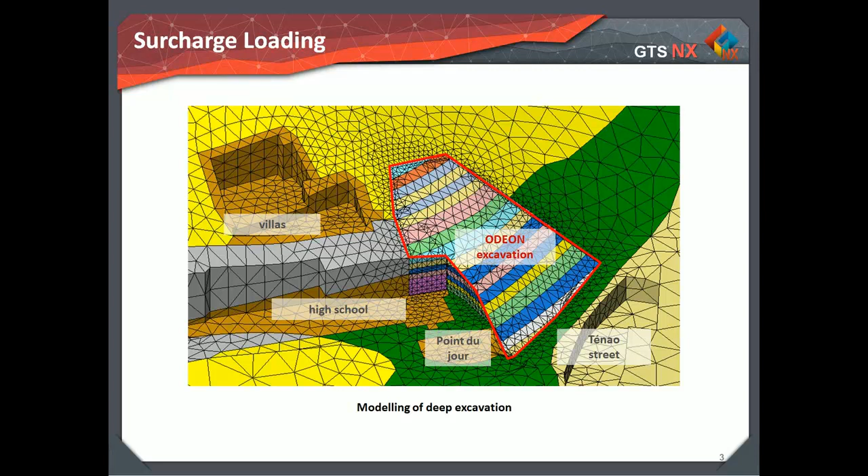There is no doubt that the building stiffness alters the pattern of retaining wall and ground movement over the greenfield situation. In any soil structure interaction situation, relative movement of the structure with respect to the soil can occur. The use of continuum elements with compatibility of displacement in a finite element analysis of this situation prohibits relative movement at the soil structure interface. Nodal compatibility of the finite element method constrains the adjacent structure and soil elements to move together.

Interface elements can be used to model soil structure boundaries such as the side of a wall or a pile or the side of a footing. Particular advantages are the ability to vary the constitutive behavior of the soil structure interface, that is the maximum wall friction angle, and to allow differential movement of the soil and the structure, that is slip and separation. The interface material can be defined using the following equation. Using the stiffness of the adjacent element and nonlinear parameters, the virtual thickness and strength reduction factor are applied. Interface material stiffness and parameters are applied differently according to the relative stiffness difference between neighboring ground and structural members. The wizard can be used to simplify this process.

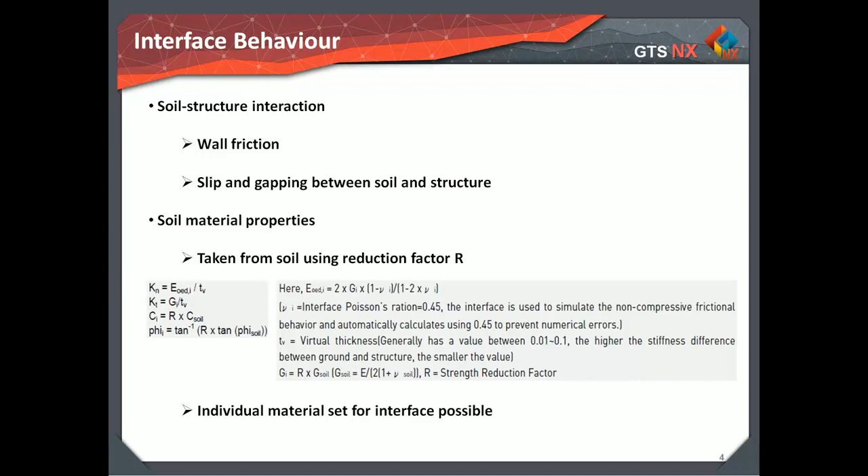The general strength reduction factors for structural members and neighboring ground properties are as follows. Checking the element size considerations calculates the interface material properties considering the average length, line, average area, face of the neighboring ground element when creating an interface. In other words, the average length and average area are multiplied by the virtual thickness in the equation below to calculate the tangent and normal direction stiffness of the interface.

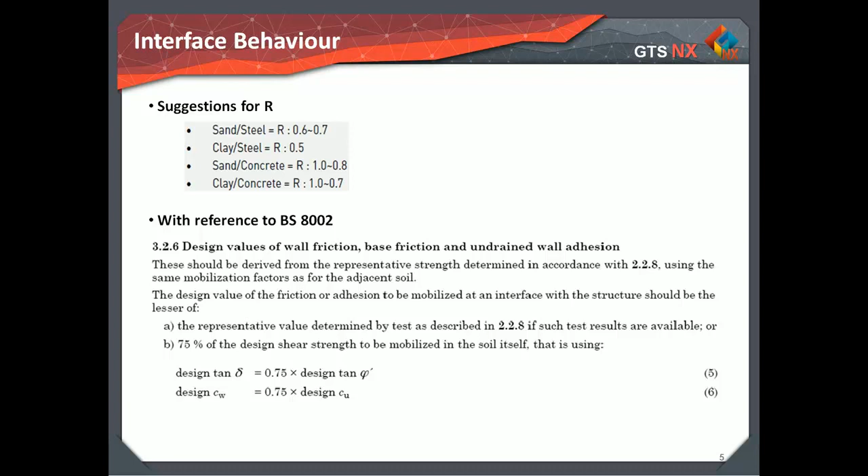A variety of techniques is used to model props and anchors. When the prop is external to the structure, it may be convenient to model the prop as a linear elastic spring with spring stiffness specified in the relevant directions. Full moment connections, such as that due to a reinforced concrete slab acting as a prop, can be modeled using solid 2D elements. The load distribution can be obtained from the compressive stress at the integration points. Anchors can be modeled by bar elements, and it is relatively easy for the program to calculate the excess force over the initial value. Beam elements have rotational as well as displacement degrees of freedom and therefore are capable of transmitting moments as well as axial force.

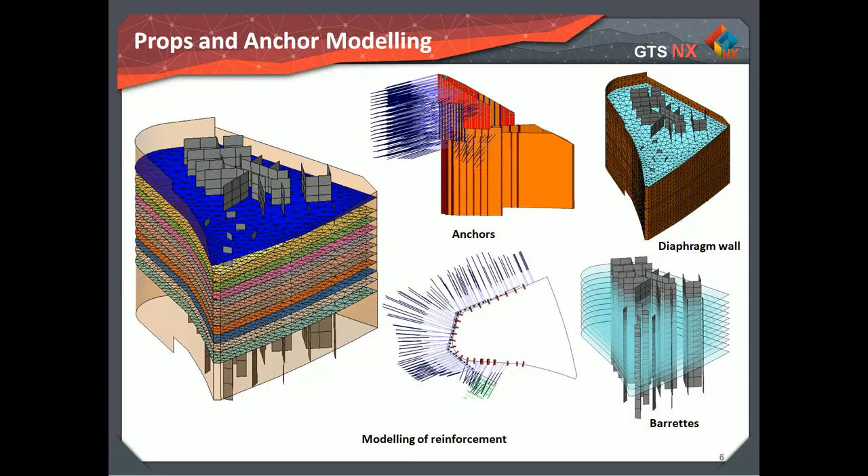Burland and Hancock illustrate this finding, for example, in their classic paper on the deep excavation at New Palace Yard in London. They assumed a linear elastic constitutive model and were able to predict the maximum measured movement relatively accurately. However, the pattern of movements predicted was inaccurate. This includes a prediction that the Big Ben clock tower would tilt in a direction exactly opposite to that which occurred. Also, the linear elastic model tended to overpredict the movement of the toe of the retaining wall. Thus, a constitutive model which incorporates nonlinear elasticity, particularly at small strain, should be used in these circumstances.

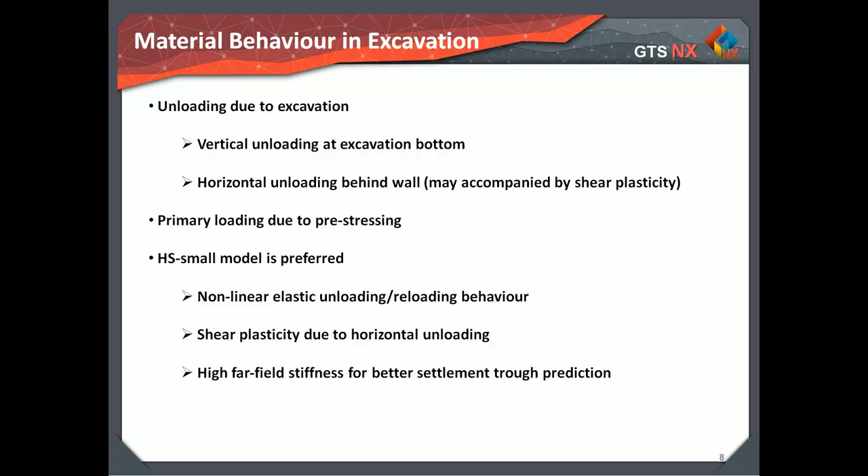It is well accepted that soil stiffness is nonlinear and that the stiffness degrades rapidly with strain. The concept of the S-shaped curve, figure in the slide, to describe this phenomenon has been well documented in the literature.

Relevance of small strain stiffness: very stiff behavior at very small strains, vibrations, reduction of stiffness with increasing strain, restart after load reversal, hysteresis in cyclic loading, energy dissipation or damping. Also relevant for applications like excavations, settlement trough behind the retaining wall, or tunnels, settlement trough above tunnel.

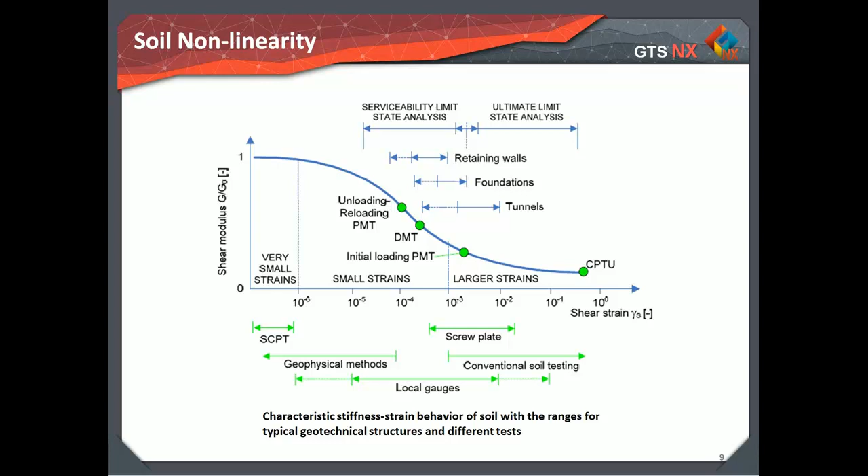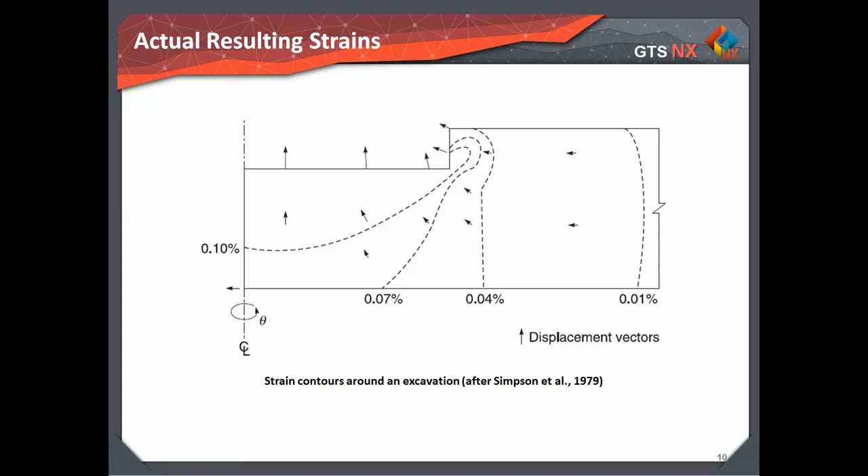It must be recognized that the strains in the ground resulting from deep excavation are very small. Figure shows that the predicted shear strains resulting from a wall displacement of 0.2% of its height vary between 0.01% and 0.1%. The figure of 0.2% height is relatively high, thus real strains are likely to be even smaller than this. The stiffness values used in any analysis must be the appropriate values for the likely strains.

The S-shaped curve shows that for strains in the typical range encountered in retaining walls, conventional triaxial test results are not applicable. This is because of bedding type errors associated with measuring displacement in conventional triaxial cells. Special triaxial equipment with local transducers mounted on the specimens is necessary. If stiffness values at strains lower than about 0.001% strain are required, then data from equipment such as the resonant column or bender elements are needed.

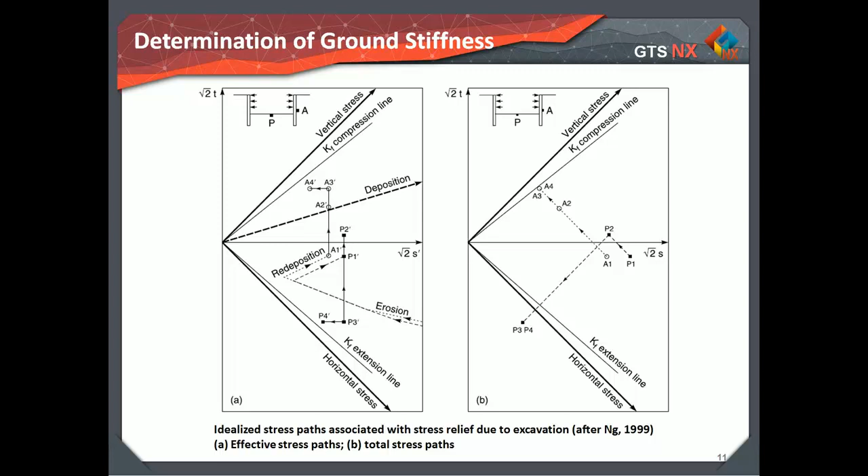There are many constitutive models available in commercial finite element packages for carrying out analysis involving nonlinear or small strain stiffness. Mohr-Coulomb is unrealistic deformations. Use of single stiffness fails to cater for the complex material at various zones, and overestimation of bottom heave, and sometimes heave of soil behind the wall, and soils below excavation behave with unloading stiffness. Even soils behind walls behave between unloading stiffness and the secant stiffness. Use of secant stiffness is too conservative.

Hardening soil model is qualitatively realistic deformation. Soil stiffness for isotropic loading, shearing, and unloading reloading can be catered for automatically in the model. More realistic bottom heave, and improved settlement trough behind the wall. Hardening soil with small strain stiffness model is qualitatively and quantitatively realistic deformations. It is improved over hardening soil to take care of far-field small strain behavior, and it is more realistic settlement trough behind the wall, narrower and deeper.

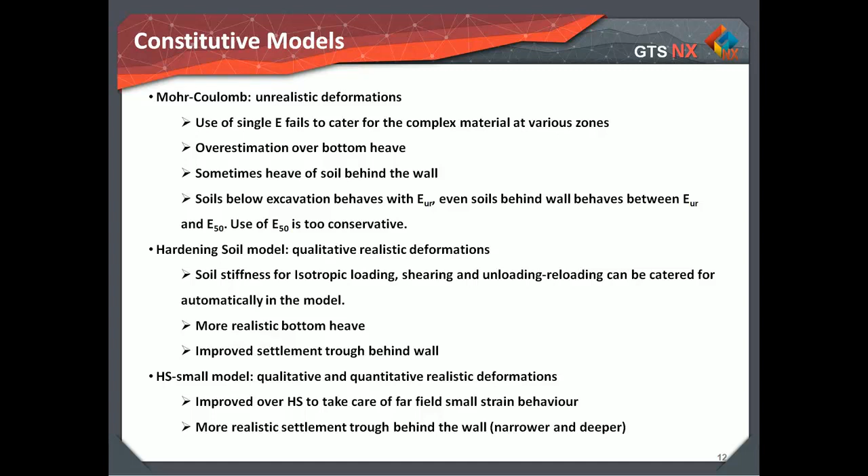Possibilities and advantages compared to Mohr-Coulomb model are better nonlinear formulation of soil behavior in general, both soft soils and hard types of soils. Distinction between primary loading and unloading reloading. Memory of pre-consolidation stress, and different stiffness for different stress paths based on standard tests. And well suited for unloading situations with simultaneous deviatoric loading, for example, excavations. And lastly, large stiffness at small strain levels, such as vibrations, but this effect is only with hardening soil with small strain.

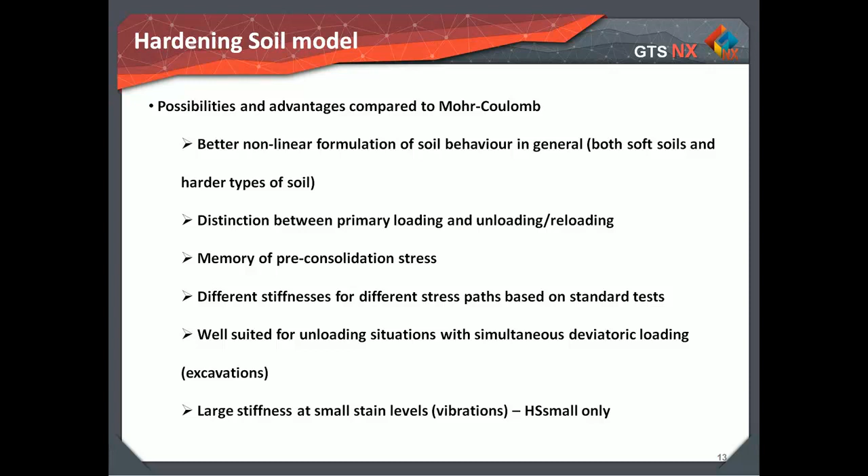The consideration of an anisotropic yield surface has significant consequence in the case of excavation in soft to medium soils. As the figure shows, on the passive side, the main yielding of the soil occurs much earlier if a more realistic anisotropic bounding surface is adopted.

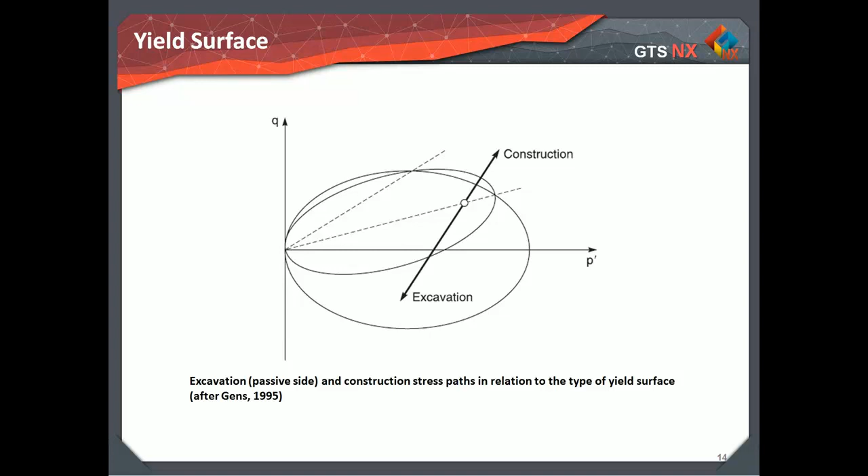Loading due to groundwater is clearly a very important component of the force acting on a retaining wall. Often, there will be a lack of relevant information in ground investigation reports. In order to overcome this, British Standard, for example, suggests a conservative groundwater regime should be assumed for design purposes. A change in the pore water pressure in part of the finite element mesh may be required. For example, during excavation in layered soils, it may be necessary to dewater granular layers to prevent bottom heave.

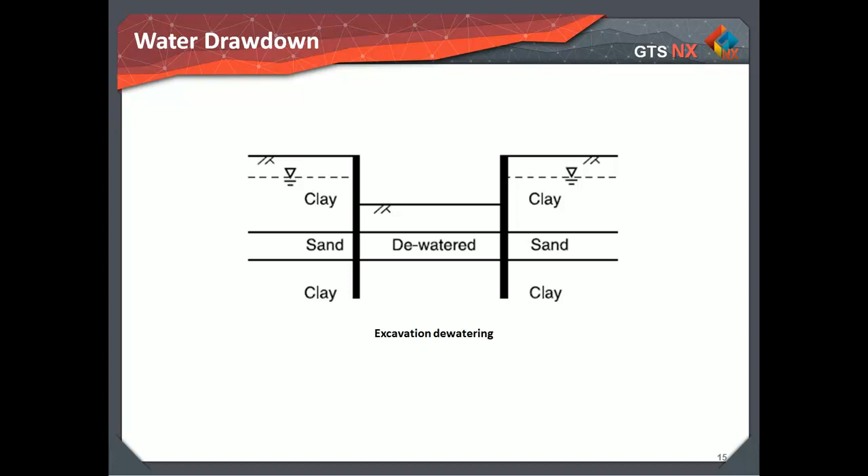For every excavation stage, in case of undrained excavation, firstly, excavate soil and then set the excavated area to a dry condition. And the phreatic level outside the excavation remains unchanged, therefore suitable for short-term excavations in low permeability soils.

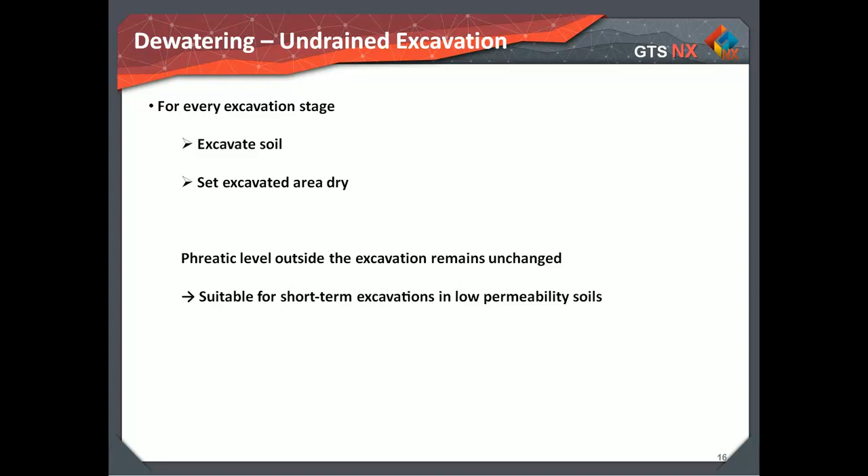In case of drained excavation, similarly for every excavation stage, firstly excavate soil and define boundary condition using the head boundary and perform a groundwater flow analysis. The phreatic level outside the excavation lowers, so it's suitable for long-term excavation in high permeability soils.

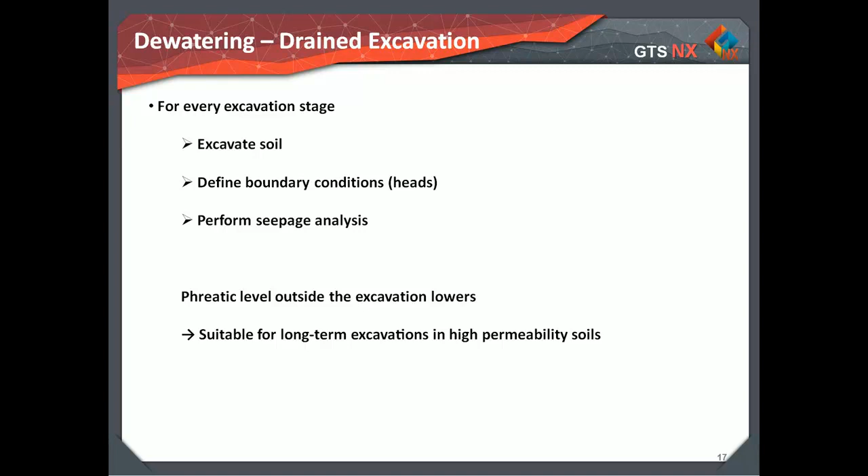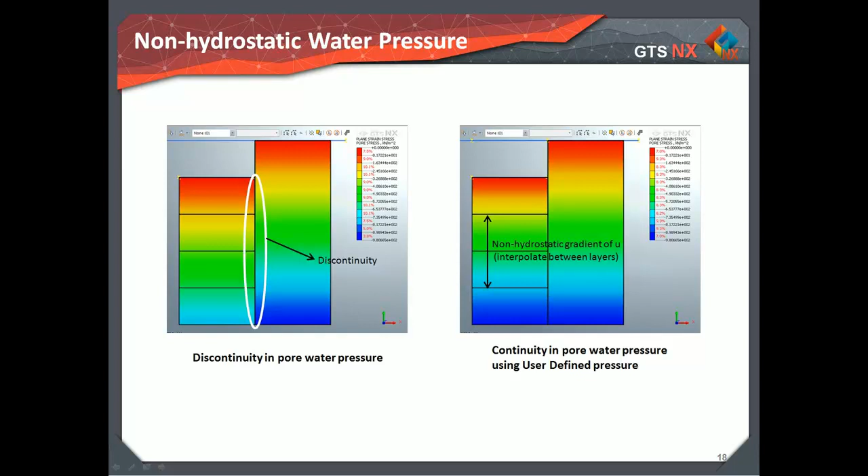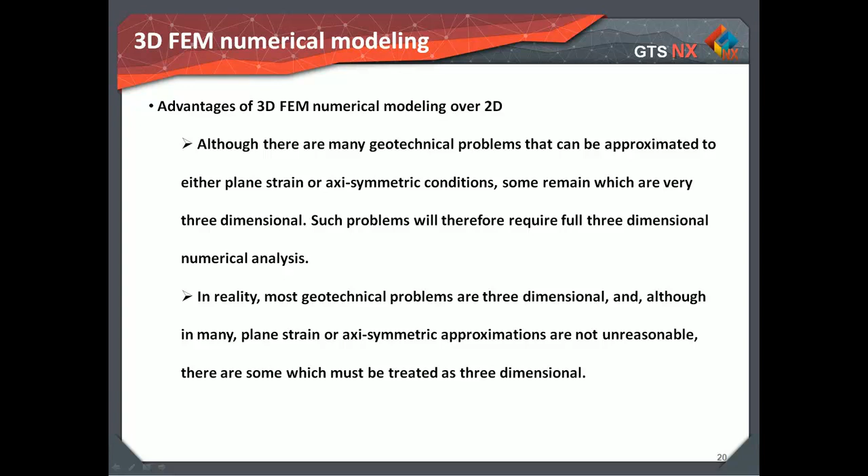Now I will present about the 3D excavation modeling. Although there are many geotechnical problems that can be approximated to either plane strain or axisymmetric conditions, some remain which are very three-dimensional. Such problems will therefore require full three-dimensional numerical analysis. In reality, most geotechnical problems are three-dimensional, and although in many, plane strain or axisymmetric approximations are not unreasonable, there are some which must be treated as three-dimensional.

Most basement excavations are three-dimensional in nature and require some degree of idealization to two-dimensional plane strain to render them solvable within realistic turnaround time on existing computing platforms. We need to consider carefully what is the effect of such idealization on the solutions.

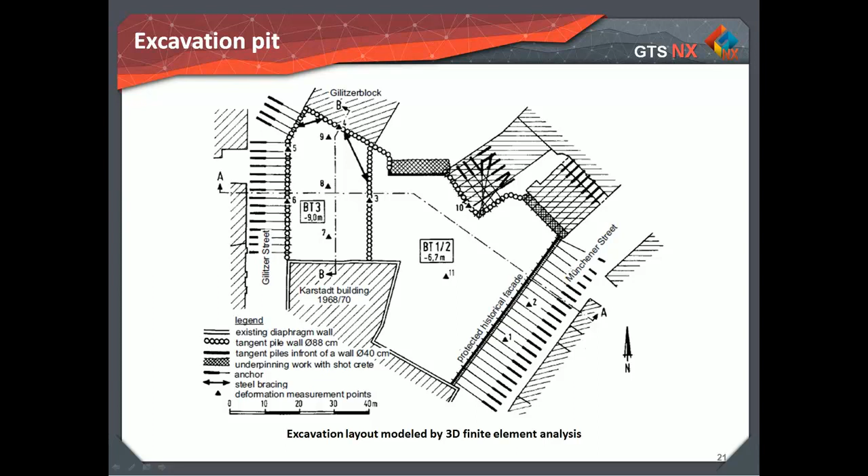One of the significant advantages when using the 3D finite element method is the corner effect. In a 2D FE model, the model is assumed as infinitely long, so that is the plane strain. However, the length to width ratio has dramatic influence on the behavior of the retaining structure. When the pit is not long enough, the maximum displacement and bending moments would be much lower than the 2D based calculation, based on the arching of the wall.

Wall length to depth ratio: low length to depth ratio, so it's a more significant corner effect. If excavation is underlain by stiff soil, then maximum wall deflection is reached above excavation level and corner effect may be suppressed if sufficiently stiff strutting systems are used. If excavation is underlain by soft soil, maximum deflection often reaches below excavation level and a stiff strutting system does not suppress the corner effect.

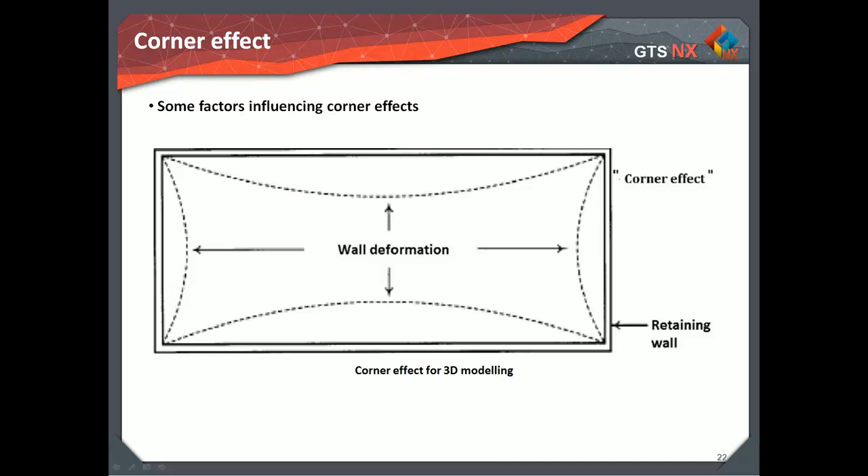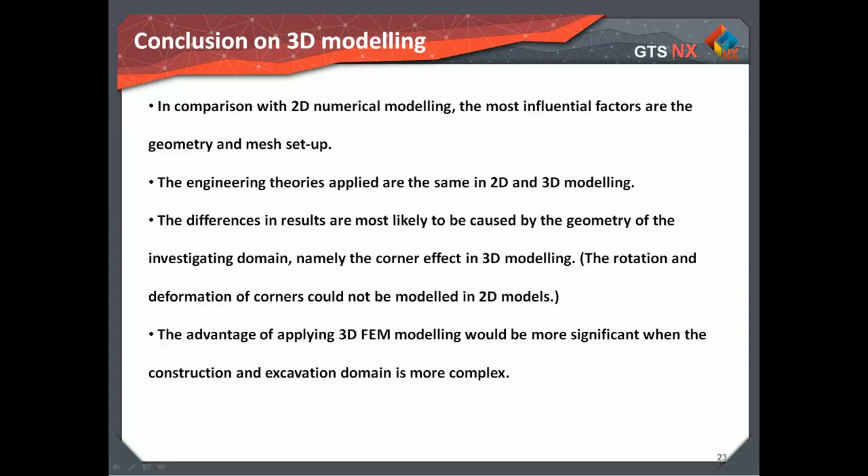The case study provides a summary of a research project related to the analysis of contiguous pile retaining walls using the limit equilibrium method as well as the finite element method using MIDAS GTS NX. The selected geometry, construction sequence, and soil conditions are based on a 4-meter deep excavation required for the construction of a rainwater attenuation tank at the Birmingham New Street Station redevelopment project in the UK. The objective of the study has been to investigate the analysis of retaining walls using the limit equilibrium approach as well as 2D and 3D FE models and compare the results with some field data to conclude on advantages and disadvantages of all three approaches.

The study obviously has a wider application to a variety of civil engineering and infrastructure projects, such as construction of deep basement excavations, buried structures and services, and the effect of such excavations on the surrounding areas and adjacent structures. Initially, I will give a very brief introduction to the fundamentals of the theoretical analysis and objectives of the study. I will then give details of the research case study followed by methodology, where I will go through the ground conditions and various analysis models. I will then go through the analysis results followed by the conclusions of the study.

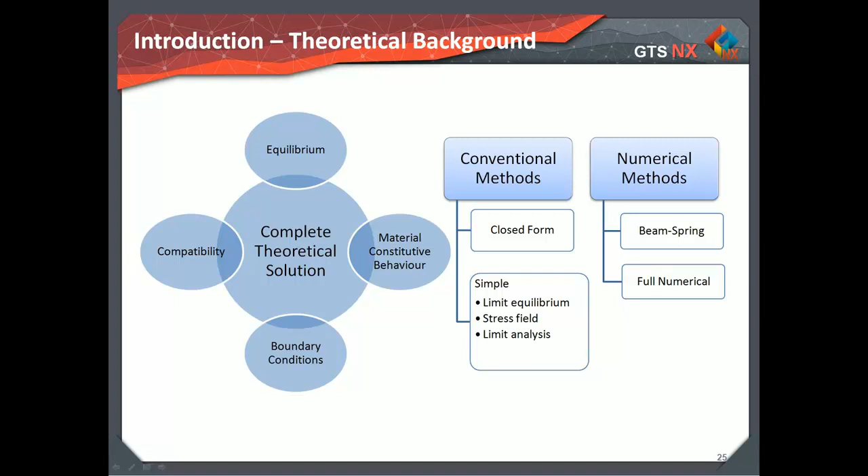Until recent years, the analysis of retaining structures has been done by simplified methods such as the Rankine and Coulomb methods or the traditional limit equilibrium method, which are based on conditions at collapse when the full strength of the soil is mobilized. Limit equilibrium calculations do not in themselves give any indication of wall movement, although some computer software considers the interaction between the wall and the soil to provide some suggestion of wall deflection. Most of these methods simplify the 3D problem to a 2D problem.

Fundamentally, the limit equilibrium design method for the analysis of embedded retaining structures assumes the wall to be rigid and the soil to have a rigid, perfectly plastic behavior. The earth pressure derives from the interaction, depending on the expected movements of the wall and the mobilization of active and passive lateral earth pressure triggered by such movement.

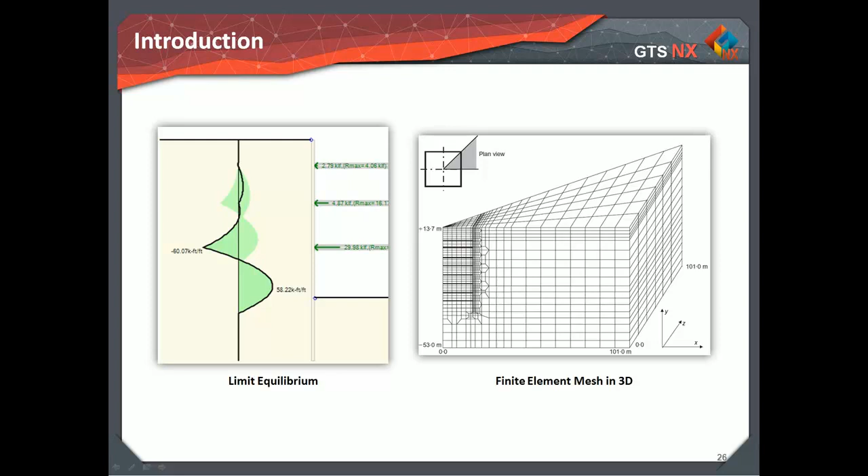Technically, full numerical analysis is the only method that satisfies all the theoretical requirements discussed earlier. It allows for realistic soil constitutive models, incorporates actual boundary conditions, represents the soil behavior with the correct geometry, and allows for modeling the initial stress state, construction process and soil structure interaction, consolidation analysis, and so on.

The research case study relates to the 4-meter deep excavation works required for the construction of an attenuation tank at the Birmingham New Street Station redevelopment project. The attenuation tank was to be formed using contiguous CFA piled walls with base and roof slabs, which you don't see here but will be shown later. The slabs act as a truss in permanent conditions.

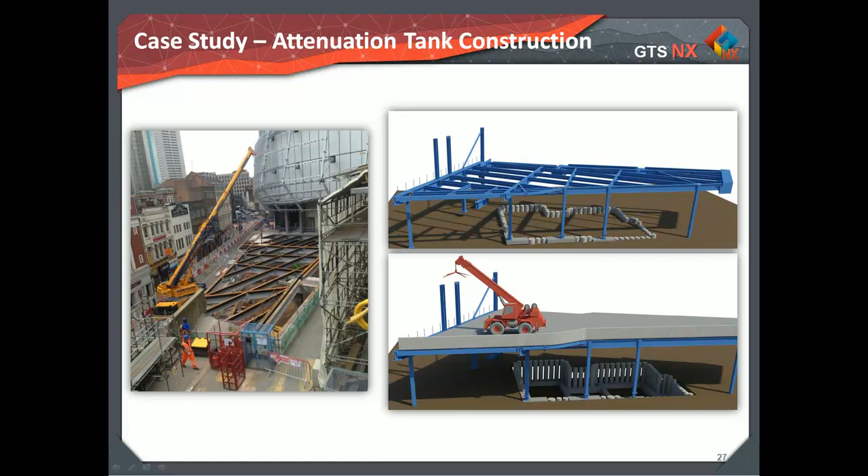The 3 columns supported by the contiguous piles were offset from the piles, thus inducing a moment at the top of the piles. In permanent conditions, this would have been resisted by the tank's roof slab. However, in temporary conditions, this exceeded the pile capacities and would result in excessive deflection of the piles. We assessed the piles for temporary and permanent conditions, and designed the steel stools for the already fabricated columns and pile caps to spread the load and utilize the increased stiffness of the wall.

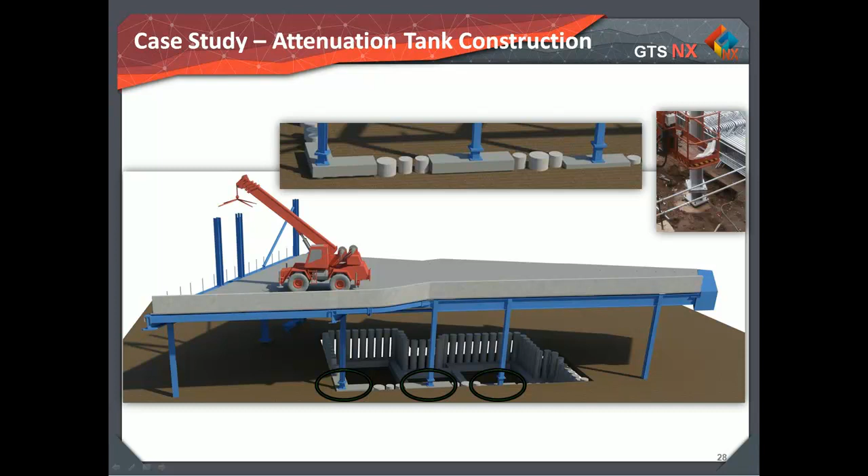Due to the construction program and the importance of installing the facade works on time, the sequence was to install CFA piles, then construct the steelwork and deck to provide the required access and platform for mobile cranes and spider cranes, and then build the attenuation tank underneath whilst the other construction activities progressed on the steelwork deck.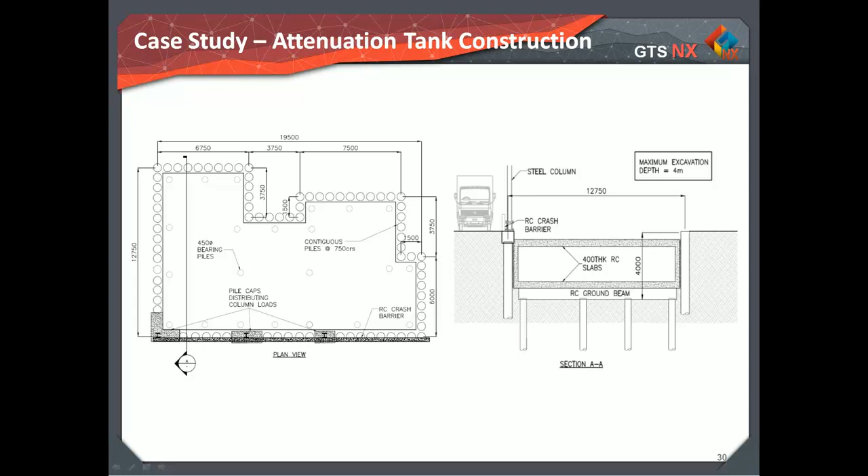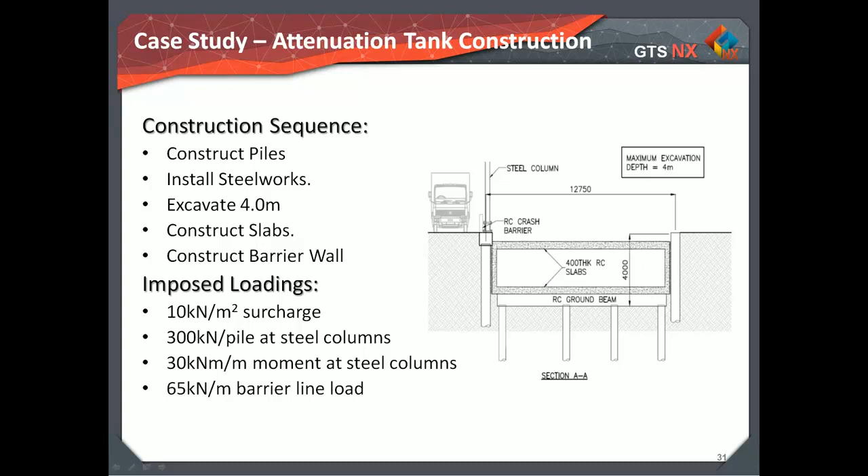The ground investigation report confirmed the existing ground in the vicinity of the attenuation tank consists of 3 or 4 meters of made ground fill on a thin layer of sandy gravel on medium dense sand, underlain by extremely weathered sandstone formation. No groundwater was observed on any of the 6 borehole logs, and therefore the water table is assumed to be well below the excavation level.

The values of phi are estimated from the SPT N values and soil descriptions of the borehole logs. For normally consolidated sand, the earth pressure coefficient at rest is calculated using the equation shown here. The lateral active and passive earth pressures for the limit equilibrium method are worked out as suggested by the British Standard. Reviewing the soil parameters closely indicates that the critical values of the sandy gravel and sand layer are fairly similar.

Considering that the sandy gravel layer is estimated to be only 1 meter thick and the majority of it will be removed on the excavation side, the effect of substituting this layer with an increased thickness of sand layer for ease of analysis is investigated. Most engineers in practice would probably take the same approach. As the soil friction angles and soil stiffness modulus are approximations, an initial sensitivity exercise is carried out to study their effectiveness at a variation of plus minus 5%.

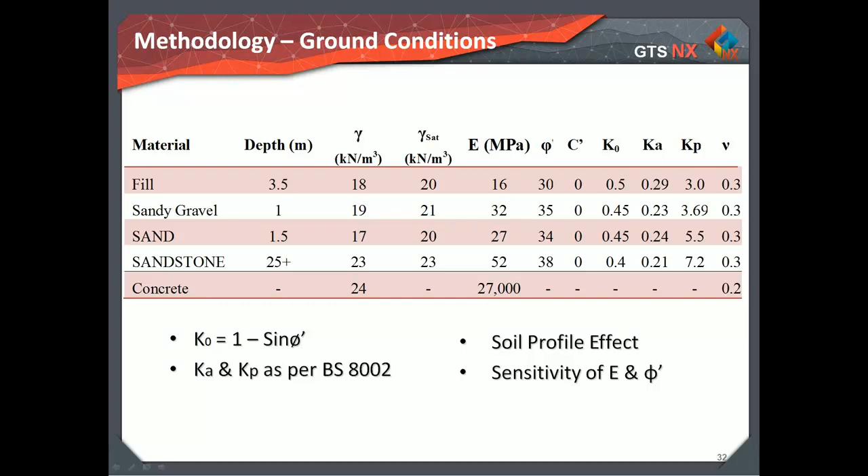For the limit equilibrium method, the computer program used consists of a series of linked software modules capable of analysis and design of embedded retaining walls. It is widely used by civil engineering contractors and pile designers to analyze construction sequences and excavations to design embedded and propped retaining structures, including contiguous bored piles similar to our case study.

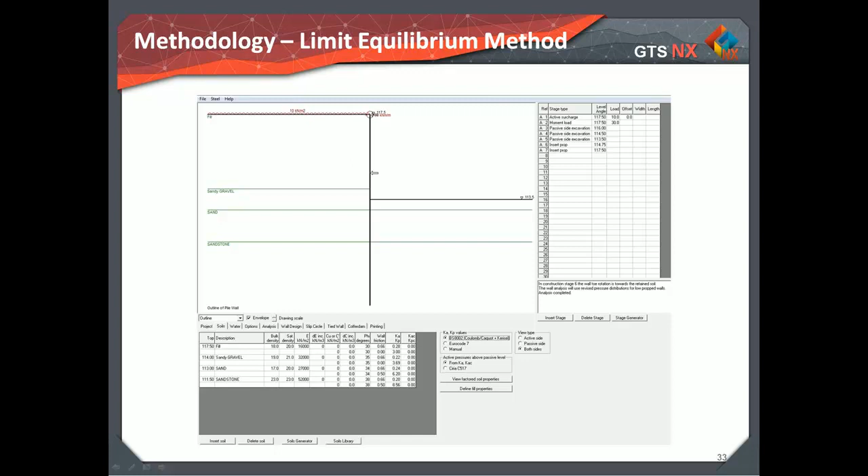The pile geometry and the soil profile of the case study are inserted into the program, followed by setting up the construction sequence as discussed before. In addition, various other soil and design parameters are also input to the program, including prop stiffness modulus, prop spacing and length, analysis options, and so on. In temporary conditions, the wall acts as a cantilever, while in permanent conditions, base and roof slabs act as struts, and the vehicle barrier wall can also apply 65 kN per meter horizontal load to the pile head.

The analysis results are then automatically tabulated for each construction stage in terms of the wall's shear force, bending moment, and deflection, as well as the factor of safety at given depths of the wall. The structural details of the piles can also be determined in terms of main and shear reinforcement. In either case, as you can see, the limit equilibrium method only considers half a section of the problem, which is a function of the method.

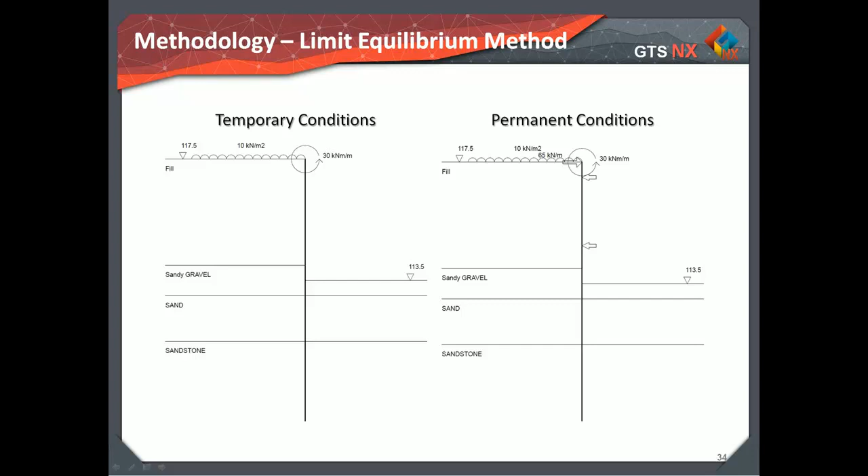The main objective of studying retaining wall stability through the finite element method is to calculate displacement and stress consistent with ground elastoplastic characteristics, and the interaction between the retaining wall and structural members. MIDAS GTS NX, a fully integrated 2D/3D FE software, is used to evaluate the application and effectiveness of the finite element method for the analysis of the case study.

For all ground material, an isotropic Mohr-Coulomb constitutive model is used as it is defined by elastoplastic behavior and provides reasonable results for general nonlinear analysis of the ground. For structural materials, that is contiguous piles and RC slabs, the isotropic elastic model is used. Identical soil and structural parameters are used as per the limit equilibrium method.

In 2D FEM, soils are modeled as 2D plane strain elements along with 1D beam elements for piles and slabs with their section property set. Slabs are modeled as 1 meter wide strut in 2D environment.

In 3D FEM, all soil models are modeled as 3D solid. Base and roof slab are treated as 2D plane stress elements and contiguous piles as 1D beam elements. As the wall is fairly thick, it could have been modeled with 2D plane stress elements with equivalent section properties.

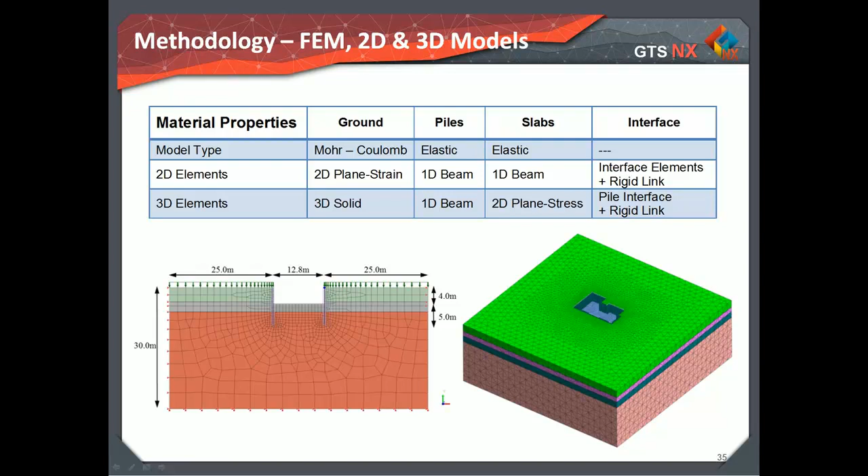The moment of inertia of 600 millimeter diameter contiguous piles at 750 millimeter centers is approximately equivalent to a 430 millimeter thick wall. However, to be consistent with the 2D model, this option is not pursued.

The initial remark between 3 layers and 4 layers soil analysis is indicated by LEM analysis on the stability safety factor, which decreased from 3.19 to 2.76 when the sandy gravel layer with the friction angle of 35 degrees is substituted with a sand layer with 34 degrees.

The wall bending moments show less proportionality, especially for 2D and 3D FE models, which predict the maximum wall bending moments to be approximately 30% lower than limit equilibrium method suggestions. The 3D model correctly suggests the worst case scenario occurs at middle columns. Thus, the graphs for the 3D method are based on this specific location.

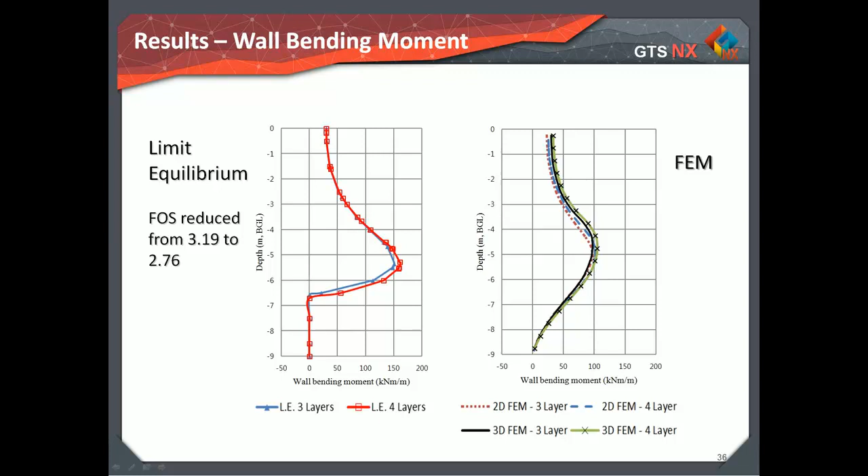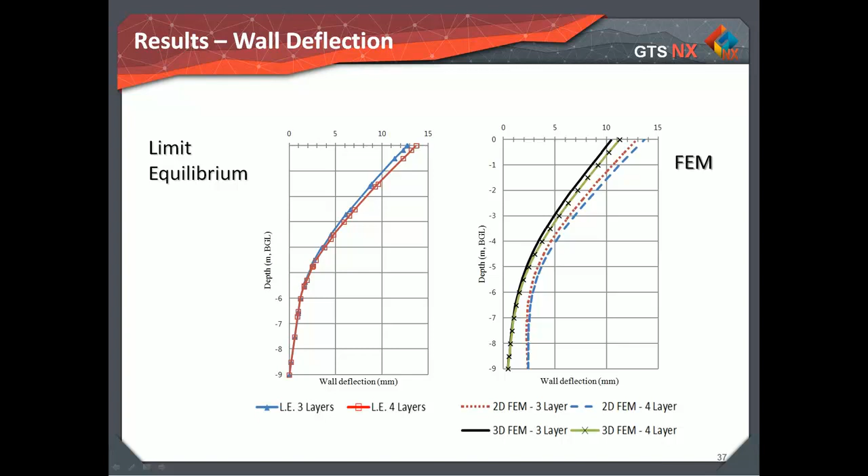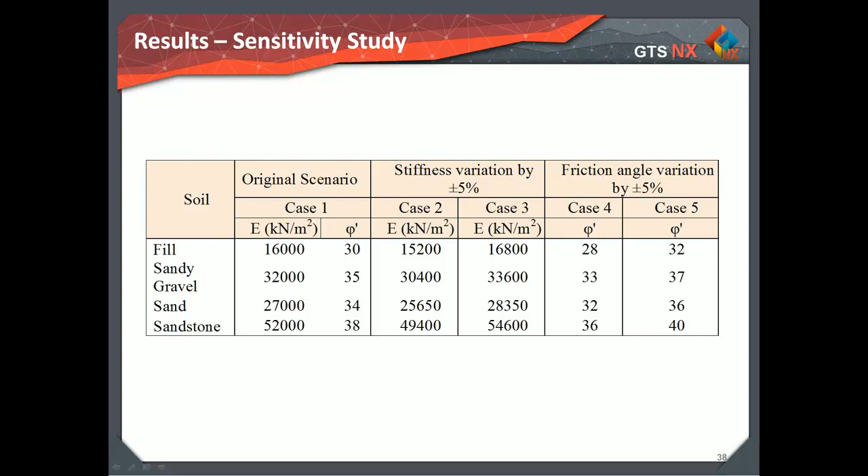To keep things simple, the sensitivity of the key analysis outputs with respect to plus minus 5% variation on soil stiffness modulus and friction angles are presented for three-layer soil at excavation stage. This is the result of the sensitivity study from the limit equilibrium method, considering 5 cases.

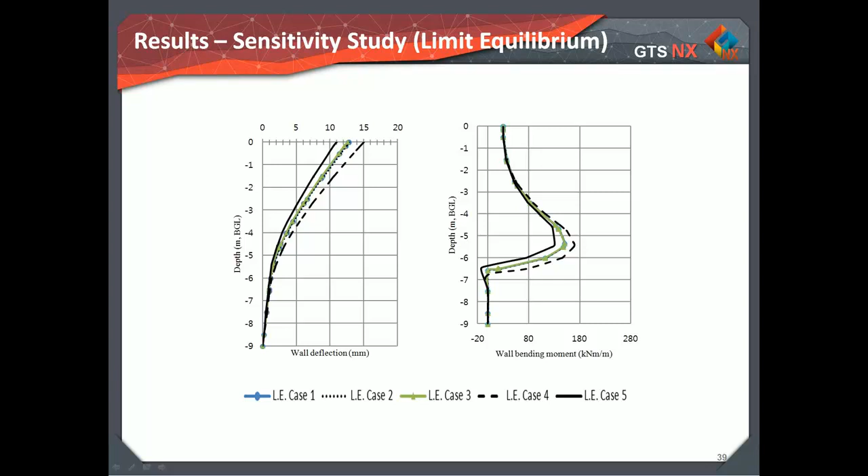All 3 methods suggest the stiffness modulus 5% variation has very little effect on wall deflections and bending moments compared to friction angles, which have a drastic inverse effect as illustrated by the graphs. This case shows the 3D FEM result for 5 cases.

per meter. The limit equilibrium safety factor on stability also showed significant variation of plus minus 20% when friction angle varied at 5% in this case. So stiffness modulus on its own had negligible effects on the stability of the cantilevered wall.

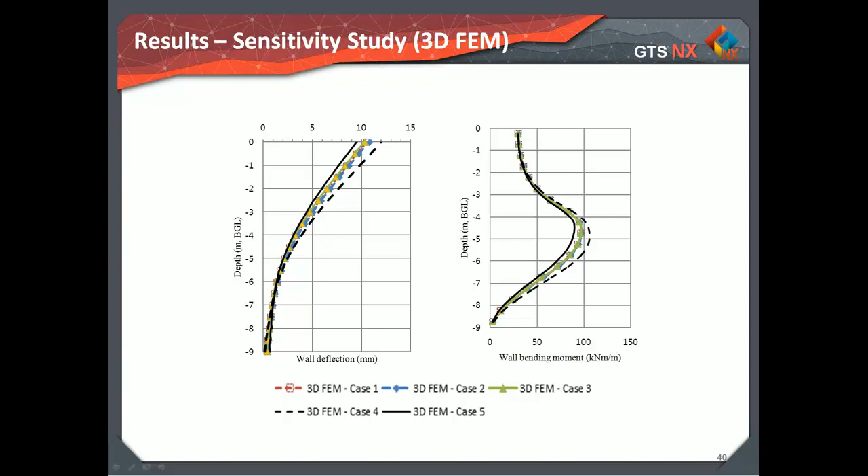Considering the cantilevered wall already supporting the earth and column loads, that is passive resistance mobilized, once the slabs are connected, we wouldn't expect much of a load before the barrier wall is applied, unless relaxation or age analysis is modeled, which is not the case here.

However, as the connections are modeled as pinned in all 3 methods, this results in the base slab in tension and the top slab in huge compression. In reality, however, this is not the case, as the base slab can only resist compression. By deactivating the base slab, we get more reasonable prop loads.

The limit equilibrium model did not consider the initial mobilized passive resistance at all and suggests a huge base slab load, but with the roof slab in, it suggests a more realistic number, but still based on an incorrect approach, therefore a problematic function of the method.

This situation is due to the deformation shape of the walls and slabs as one structure when subject to line and moment loads at the piles in an asymmetric profile. The limit equilibrium model assumes a symmetrical behavior and ignores the 3D geometry of the structure along with the associated load path. And the suggested limit equilibrium results look less drastic, though they have been calculated incorrectly.

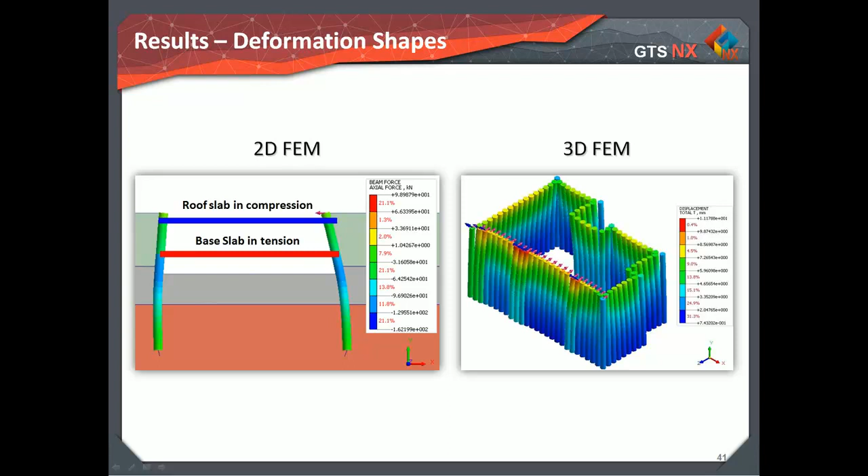It is worth noting that analysis of a half section in 2D finite element analysis would not have predicted this asymmetric behavior either. This figure on the right illustrates the displacement shape in 3 dimensions and the location with relatively higher displacement due to the moment load applied by the columns. The limit equilibrium method is not capable of modeling this at all.

This slide is perhaps the most critical slide of this webinar, as the graph indicates the summary of research in temporary conditions, which is the most critical. In short, both finite element models suggest lower bending moments with more realistic shapes. It is obvious that the maximum bending moments suggested by the limit equilibrium method are more than 50% higher than both 2D and 3D finite element models, which suggest fairly equal values and a more realistic profile.

Limit equilibrium method indicates zero bending moment in the wall where passive and active moments are equal, that is safety factor of 1. In terms of deflection, the 3D model illustrates approximately 40% lower values than the 2D FEM model and the LEM model. All 8 pile heads supporting steel columns were monitored during excavation, as I mentioned, using total station EDMs for possible movements. Displacements recorded on a daily basis during the excavation works were very minimal, in the order of 3 or 4 millimeters towards the excavation side.

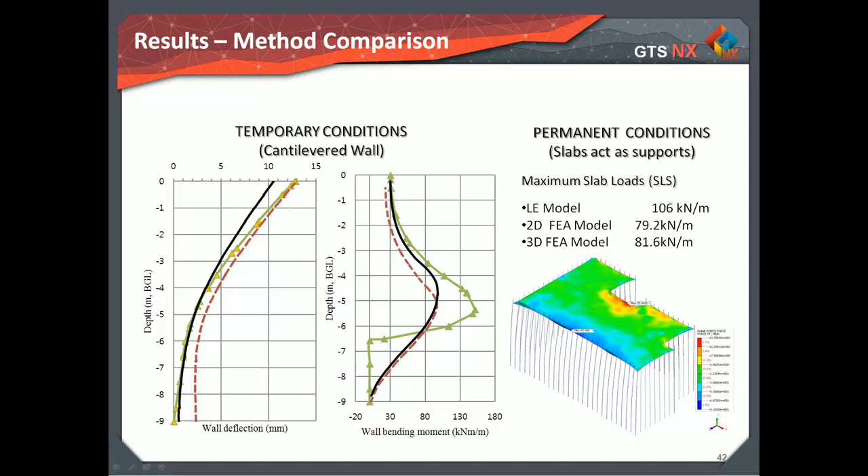Ability to operate the programs has been the main part of the research project. In the case of MIDAS GTS NX, online operator manuals and a number of tutorial clips published by MIDAS have been used to learn the modeling and analysis functions. The layout is user-friendly considering the complexity of finite element modeling, and the quality of produced results is impressive. The 2D modeling takes significantly less time compared to the 3D modeling. 3D modeling can be challenging until the functions and methods are learned in depth. The modeling time clearly depends on the complexity of the problem.

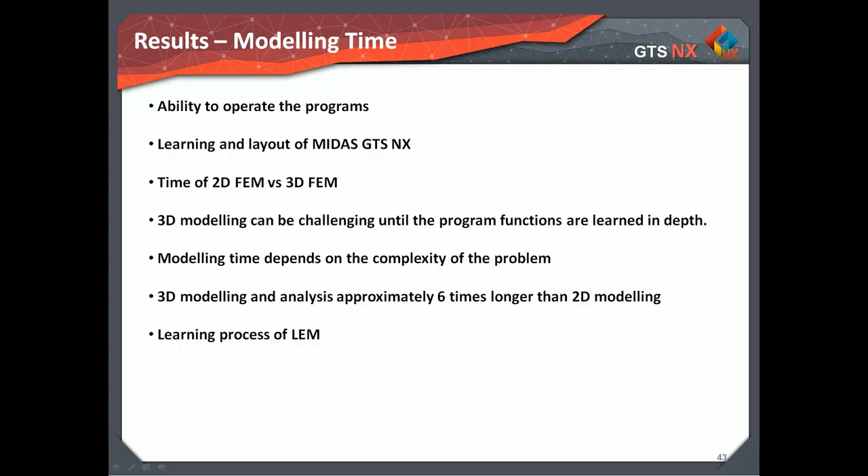During this project, the 3D modeling and analysis took approximately 6 times longer than 2D modeling, including exploring various modeling options. Obviously, the 3D model provides more realistic results than the other methods. In the case of LEM, limit equilibrium method, the learning process is much more simplified, and assuming all soil parameters are available, one set of analysis can be done in 2 or 3 hours. These conclusions are made based on the analysis performed.

All methods suggest the stiffness modulus 5% variation on its own has very little effect on wall deflections and bending moments compared to friction angle, which has a drastic inverse effect. This was particularly noticeable for the 2D FEA model, where a 2 degree decrease in friction angle increased the pile head deflection by 50%. I should mention that bigger variation of elastic modulus should be considered in case of uncertainties in the initial stiffness values.

Due to the asymmetric profile of the problem, full section 2D and 3D FE models predict more realistic deformation shapes, although the prop connections had significant effect on behavior of the structure. Limit equilibrium missed this criterion completely, whilst analysis of a half section in finite element would not have predicted the asymmetrical behavior either. Maximum bending moments were in the region of 150 kN per meter for limit equilibrium, while both FE models suggest 90 to 110, which is a 30 or 40% reduction.